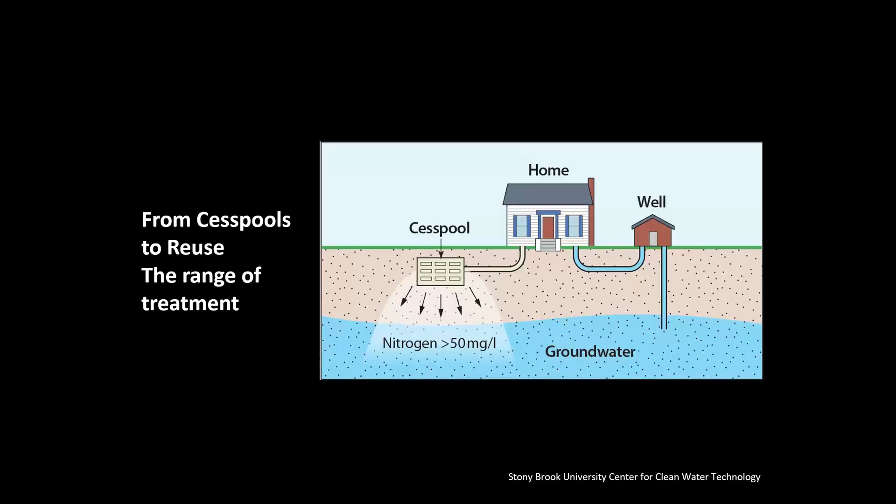I'll talk a lot about nitrogen. A cesspool typically has a nitrate level, or total nitrogen level, anywhere from 50 milligrams per liter all the way up to 150 milligrams per liter entering, or being discharged out of the bottom of that.

Next up in the line is a conventional septic system. In essence, what's happening here is the waste leaves your house, enters a tank, and then goes out for distribution after it leaves that tank. The purpose of adding that tank in between is to trap solids, primarily for the purpose of trapping pathogens. Again, this is all public health driven. There's a little bit of nutrient retention within those tanks.

So the nitrates, or total nitrogen level, leaving the bottom of the leaching structure or drain field—in most places people use drain fields, spreading the waste out horizontally, shallower in the root zone. You get a little bit better attenuation of nutrients and other contaminants by using a leach field or drain field. This works fairly well for trapping solids, trapping fats, oils, and greases from going into the ground, and also trapping some pathogens.

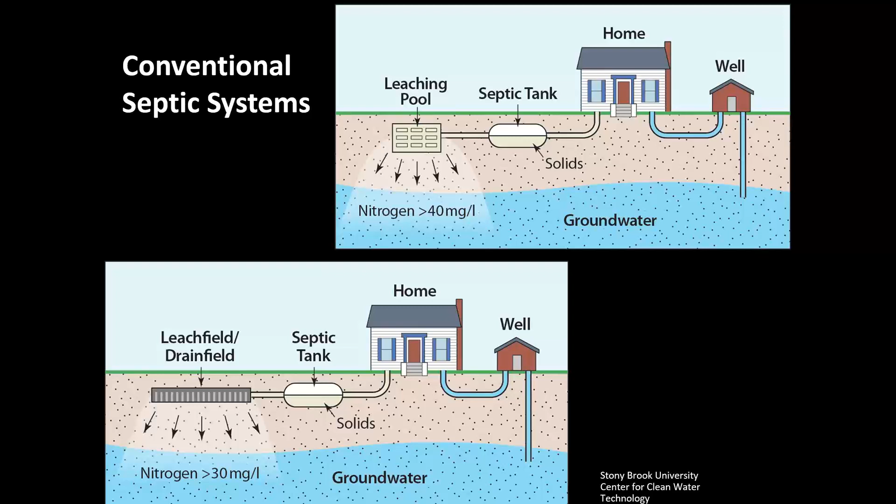However, the implication is that it's maintained, right? So this is what a typical two-part septic tank looks like below the ground—you'd have the water coming in here from the left side of the screen.

It drops down, and this section is big enough that the waste should stay within here for about 2 days before it enters this smaller chamber and then goes out to the leaching structure. Now, if the system isn't inspected and or maintained properly, solids begin to build up in the bottom, and you get a feedback where the more solids build up, the less time the waste has to settle, so solids build up faster.

That begins to fill up the bottom part of the tank, and at the top are your fats, oils, and greases, which rise to the top. What could happen, and I've seen happen over time, is if this type of tank is not inspected and or pumped on an appropriate basis, those two levels can constrict the water, and literally what was a tank is now acting more or less as a pipe, and you're left with just a cesspool, and or it backs up into your house and you have a really bad mess and a big problem within the home.

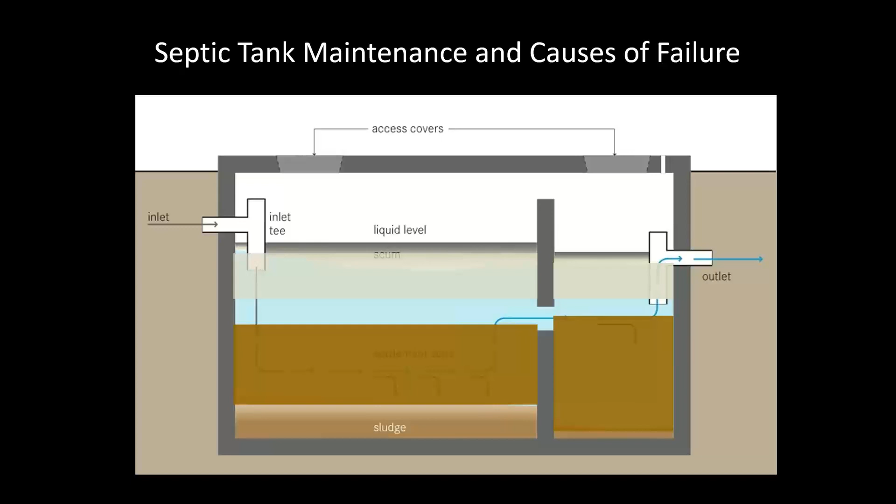And so that gets us to failure. What does failure mean? There are two types of failure. Hydraulic failure means that the soils can't take up any more water, that the pore spaces within the soils have accumulated so much organic matter that they can no longer take the water in, or the effluent of the waste anymore, and then it either comes up to the surface or it backs up into the house.

You can see this with cesspools. Often you'll see a big green ring on someone's property that might not otherwise have much for a lawn, and you know that they have a cesspool or hydraulic failure.

Structural failures are much more serious, and sadly they do happen, and sadly people have been known to get hurt and or die in a structural failure, where you actually have a collapsing of the system and you have everything exposed to the surface. What you see here on the right is a hand-laid brick cesspool.

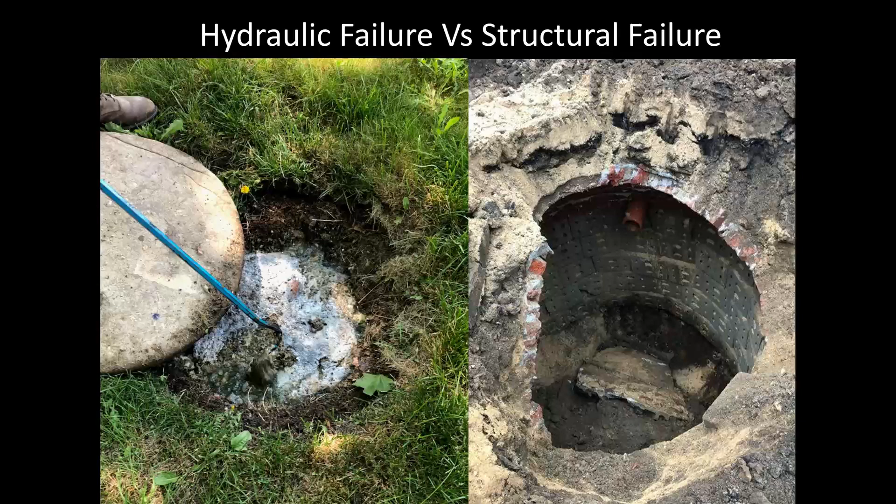Cesspools and septic systems can also fail due to sea level rise. So your system might be functioning. You might be able to flush your toilet. There might not be solids or fats built up anywhere, and the drain field might be able to drain. But what happens is if there's not enough separation between the bottom of that drain field and the groundwater, the soils can no longer serve the function of filtering out pathogens, and then you compromise the groundwater, which then ultimately leads to your surface water.

This is from a report to Miami-Dade County on what is currently happening to a lot of their on-site systems. When a development might have been built long ago, the groundwater was down here. Now several decades have passed and we have sea level rise projections coming for the area. A home at a certain elevation might have a completely compromised or fully failed system. It is now in contact with the groundwater.

This person might still be able to flush their toilet, but they're putting raw sewage directly into the groundwater. A compromised system, as I mentioned, will not have adequate separation to remove those pathogens, and you're compromising the groundwater. And then a home at a slightly higher elevation will still have that separation, but its lifetime is shortened due to sea level rise.

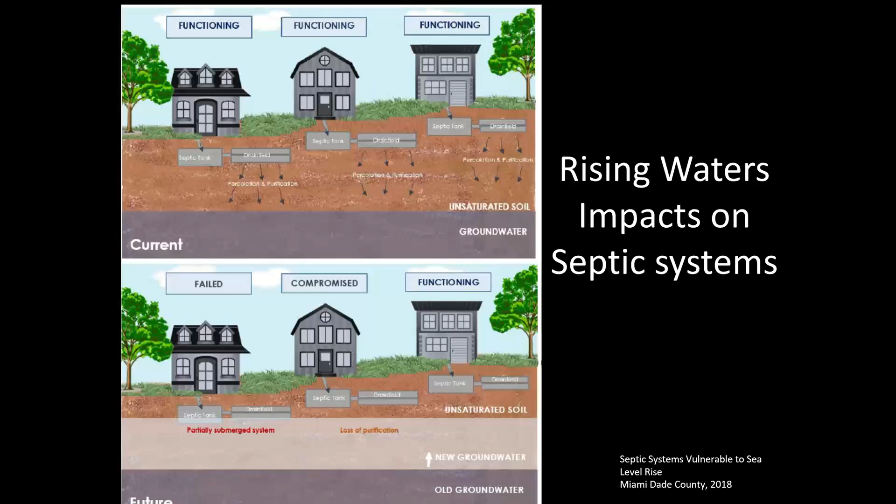So now we'll talk about septic systems and their ability to reduce nitrogen loads. Some call these advanced septic systems, where you have a septic tank coming out of the house where you collect the waste. That then goes to some sort of treatment unit, which may, through processes of aeration and then going back towards an unaerated compartment, be able to remove nitrogen from the system, and then it will go to a drain field.

We'll take an accepted standard of about 60 milligrams per liter of nitrogen coming out of a home, which will then go to a tank and reduce nitrogen loads by about 7% or so. The treatment unit could then get anywhere between 50 and 75% nitrogen removal, getting you down into the teens of nitrogen concentrations. That then goes to a drain field, which gets you an additional 35 to 50% nitrogen removal, with a grand total of 70 to 85% total reduction in nitrogen.

And now, since that effluent coming out of that drain field is stripped of so much of the solids, the nitrates, and the BOD, the biological oxygen demand, which is basically a number of how strong the wastewater is, the soils can do a better job of stripping the wastewater of some of the other contaminants like the pharmaceuticals, the personal care products, and other nutrients like phosphorus. So the cleaner the water is before it hits the soils, the more the microbes in the soils can do to reduce all of the other contaminants.

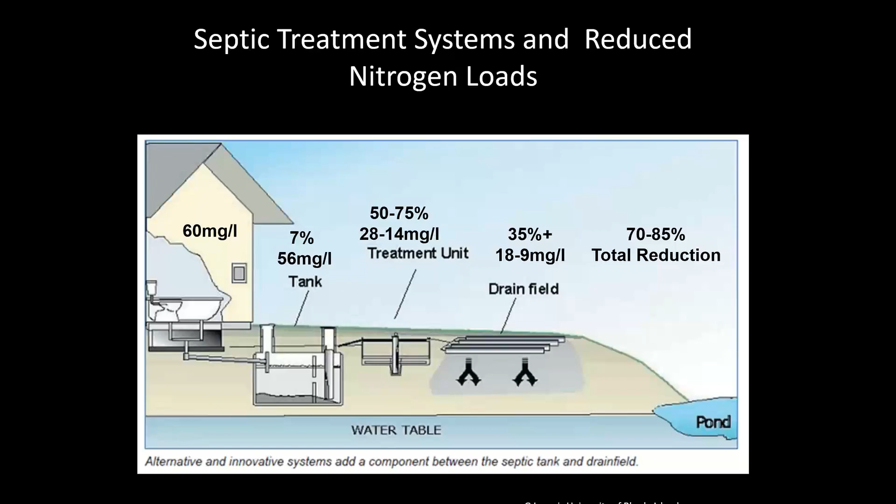Now, all of these systems, as well as most sewage treatment plants, rely upon natural biological processes or microbiological processes. You go to the bathroom, you have organic nitrogen, your proteins, your urea. They leave your home, go into an area without oxygen, and perform a process known as ammonification. They transform organic nitrogen to ammonium.

Now, the next process would be to add aeration, and the microbes that live in the aeration compartment convert the ammonium to nitrate. In most treatment facilities, this is nearly 100% complete process.

Now, if you wanted to fully strip out all the nitrogen from the waste stream before it enters the environment or before it goes out for reuse, you need to send that nitrate-rich effluent back to an environment that has no oxygen and a carbon source, where it will perform the process of denitrification and release the nitrogen as nitrogen gas. Most sewage treatment plants and most on-site sewage treatment systems are limited by the amount of carbon in the waste stream to perform this function, so some add carbon during their processes.

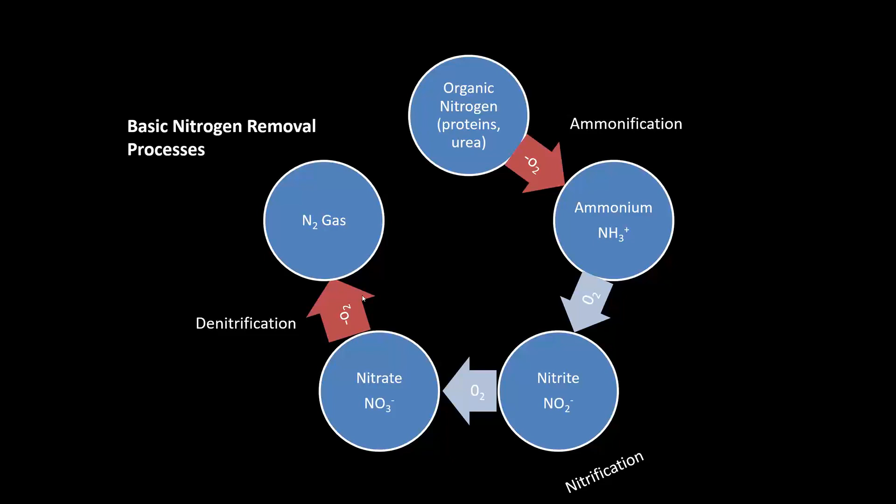So now we'll get a little further down the line and think about the components of a typical sewage treatment system. You have your collection area, and that might be a business district, homes, or some commercial properties. That water gets from the home and goes into a small lateral line for collection. There's a lateral coming out of each home or business, and typically those are privately owned and on private property.

Then it goes into a conveyance system where it gets collected, and those pipes go into bigger pipes known as mains. Some of these mains can be pretty large. If you're fully relying on gravity, they go deeper and deeper into the ground, and sometimes need to be raised back up to rely on gravity again, in which case they'll have a pumping station and then use gravity once again.

Then it goes to the treatment facility where the wastewater gets separated from the sludge and whatever solids are in it, and the effluent then gets treated through the processes I've mentioned above, and then that eventually either gets discharged to the ground or to your receiving water body.

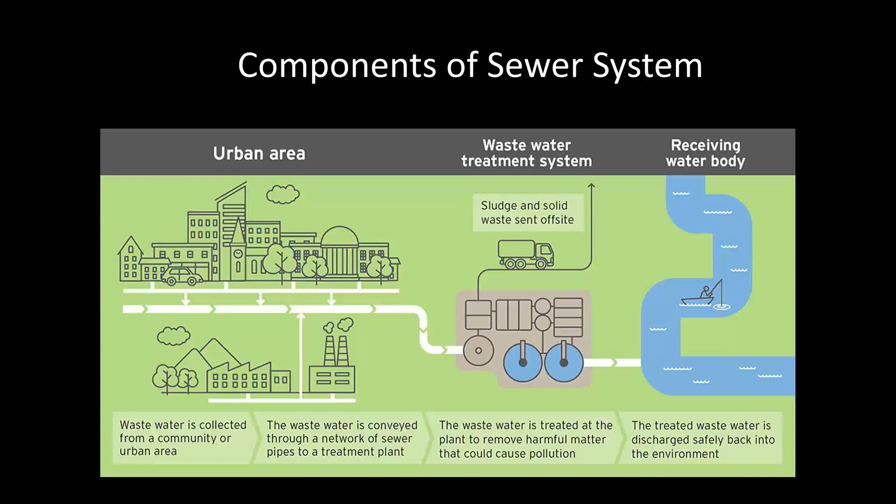So what happens in that treatment process? For one thing, a lot of these sewage treatment plants rely upon gravity to get to the treatment facility, so then they have to lift up all of that sewage so that it could then flow by gravity from one compartment to the next.

The first thing is to pull out lots of solids. There's all sorts of things that end up in the sewage collection system. I've heard of everything from sweatshirts to car tires showing up at our sewage collection system. So they need to sieve out and collect a lot of the garbage and sludge that comes out.

That then goes into those settling compartments that I mentioned, where they have ammonification happening. So the solids begin to settle to the bottom, and over time, as it goes from one baffle to the next, it gets clearer and clearer.

And then the effluent then goes into aeration compartments or bioreactors, where you have aeration and that process of nitrification, breaking down the ammonium into nitrate.

That then would go into a final secondary set of clarifiers, where they have these rotors that move really slowly to keep the water mixed, but they are careful not to add oxygen into that environment, to create the process of denitrification. Some plants at this point could have close to drinkable water. However, the pathogens and such are still in there at this point.

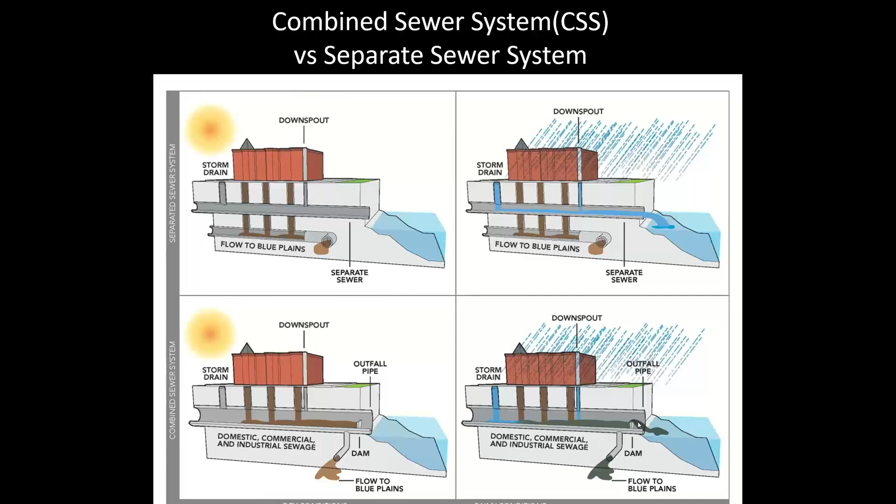But what happens when it rains in a combined sewer system is the flow reaches a point where the receiving treatment facility can't handle all of it. They build little weirs at the ends of their drain pipes so that when flow reaches the point where it could go over that weir, you get a direct combined sewer overflow discharge to your surface water, and now you have raw sewage entering your surface waters.

It had been a challenge to the community for a couple of decades, with lots of complaints about its performance, and nobody had the budget to really do anything about it. So everything kept getting pushed off with this facility. It was completely inundated during Superstorm Sandy, and even to this day, certain parts of it still rely on backup generators to function.

But it's come a long way in the last 9 years or so. They've actually been able to restructure the existing facility, taking 4 of the settling tanks and transforming them into tertiary treatment tanks, which remove the nitrogen from the system. So this sewage treatment plant now puts out 50% less nitrogen than it did just several years ago.

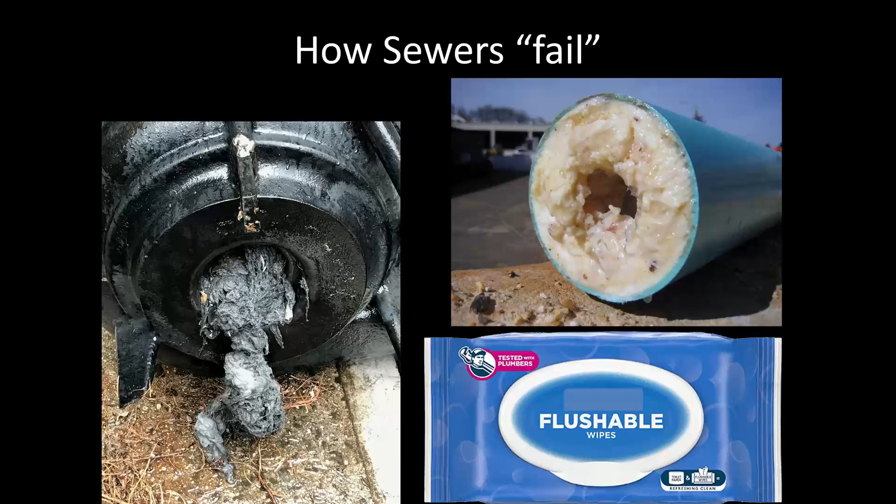Now, I mentioned the sanitary sewer overflow. A combined sewer overflow is when storm water and wastewater are mixed and overflow directly into a surface water body. A sanitary sewer overflow only occurs in a separate sewer system, and this happens when things like wipes and fats, oils, and greases block up the system.

Your street drains go directly into their own stormwater system, and the sewer lateral comes out of the home and enters the sewer main in the street. Over time, a homeowner might have flooding on their property when it rains, so they hook their downspout into the sewer lateral instead.

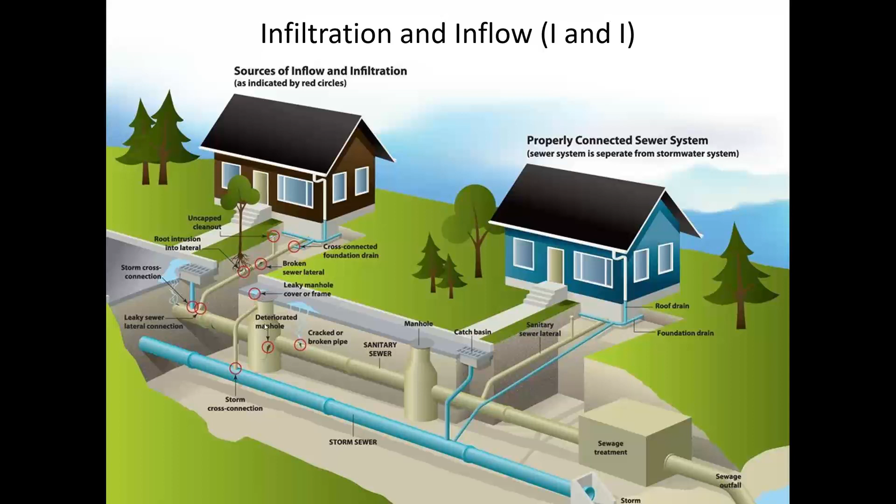After they fixed the system, the flow became much less. They still get peaks when it rains, but for the most part the system is receiving and handling much less water than before. As an example, the treatment facility I showed you earlier has a collection system in really good shape, returning to normal flow within a day or two after a heavy rainfall event.

In contrast, a treatment facility just to the east of it took a whole week to return to normal flow level after about a 12-inch rain event a couple of weeks ago. That's because the groundwater was so high that water just kept coming into the system. Treating rainwater is not an efficient use of a sewage treatment plant.

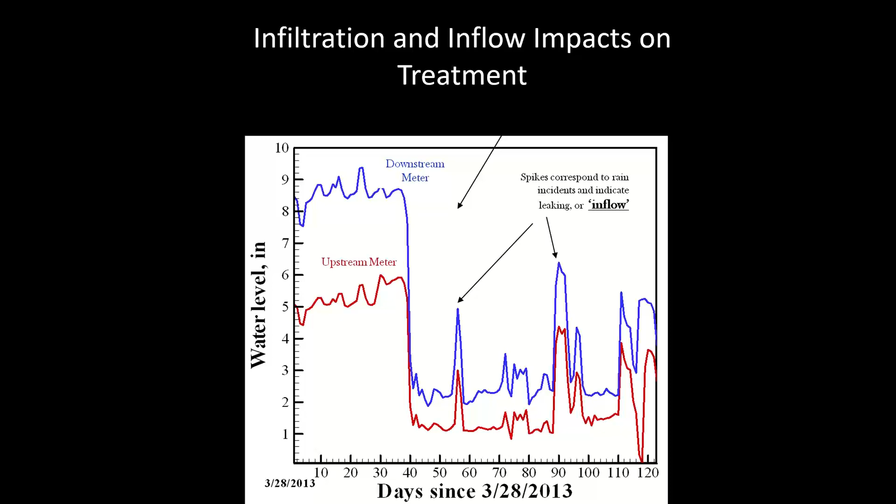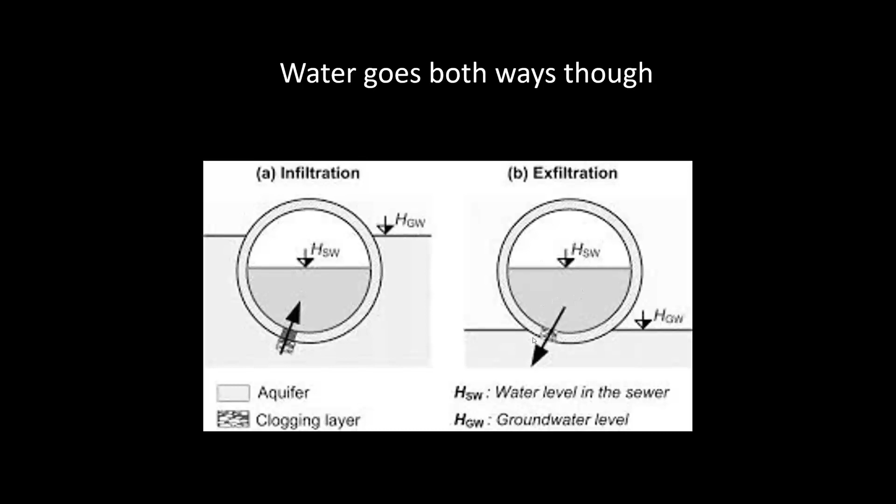And then in dry times, water goes both ways. If you have a force main, where the water going through the pipe is under pressure, you could get sewage leaking out of those mains—that's called exfiltration. So infiltration is when you have high groundwater exerting pressure on the pipes, causing water to come in. And when those pipes are dry and under pressure, you can get sewage leaking out of the pipes into the groundwater.

Don't let a sewage treatment plant be your goal. Don't let on-site systems be your goal. There's an approach to finding the right solution for every situation, and let clean water and healthy oceans be the goal.

Ultimately your path to finding those solutions will rely on what your nitrogen reductions are. You could have on-site systems, or clustered systems where just a few houses share a system. A satellite system is where you have a small sewage treatment plant and water is collected from a neighborhood and sent to one facility. And then you could have a large centralized sewer system.

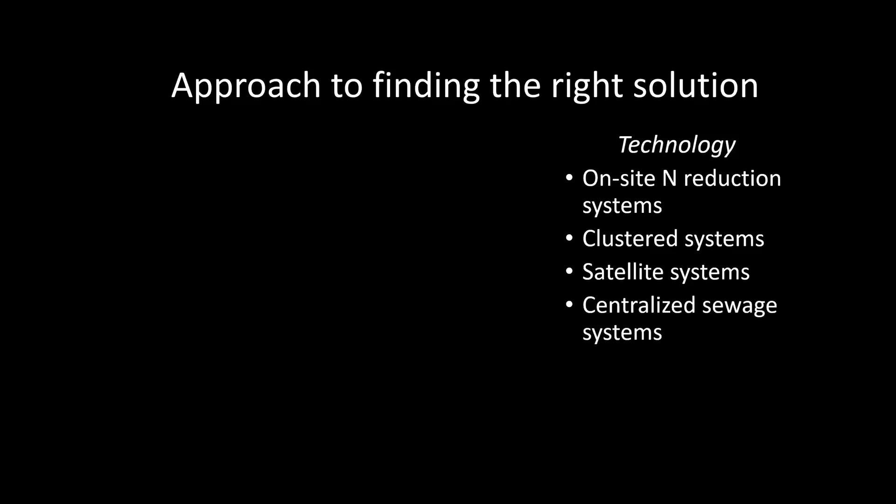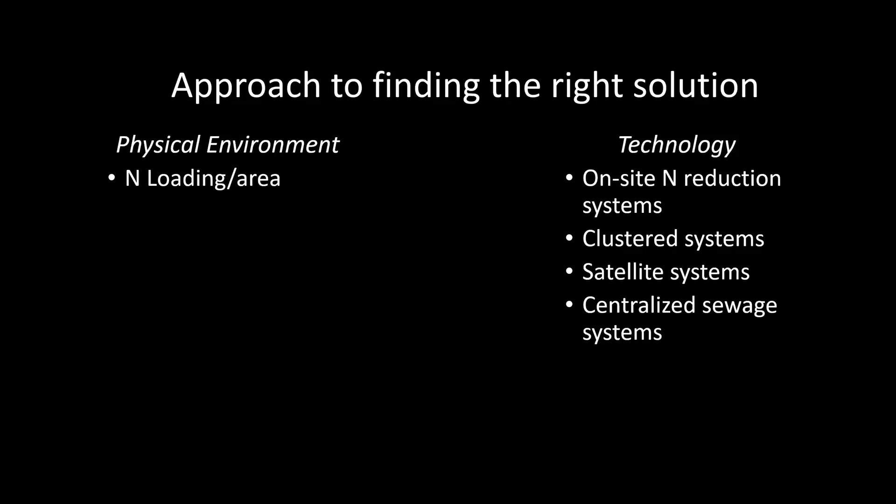That has to be balanced with the physical environment. How much loading, or what's the pathogen or pollutant of concern you want to reduce per unit area? The residence time, so what's the impact to the receiving water that the sewage is going to? For us, depth to groundwater is a really big deal - we have water beneath our feet, quite literally. Your soil types, and what type of density you're looking to capture.

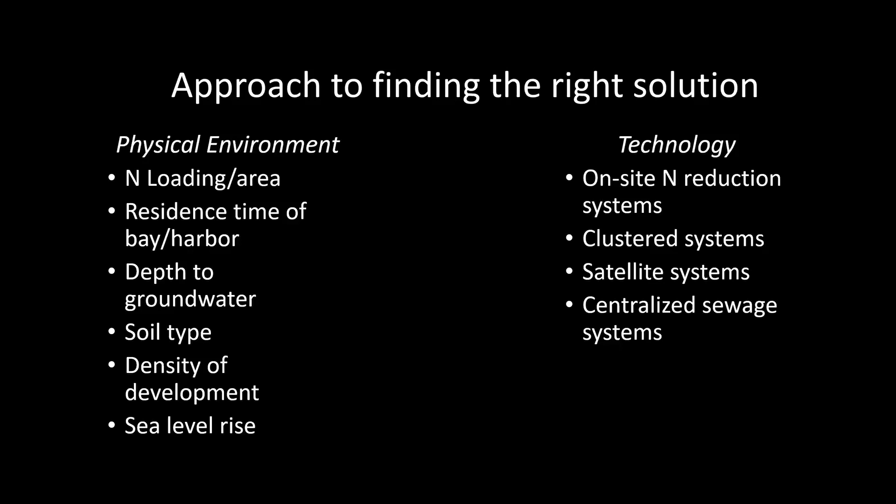And every scenario should consider sea level rise. A lot of these big sewage treatment plants are put intentionally close to the coast because they rely on gravity. That might not be the best solution moving forward.

And then you have to balance all of this with costs - how much is the cost, and what's the workforce required to do operations and maintenance? That will give you a number of what's your best bang for the buck, cost per pound of removal of whatever your pollutant of concern is.

I would never have imagined 6-7 years ago that these on-site systems would be more cost effective than a sewage treatment facility. Conventional knowledge was that they weren't, but the costs lately are showing that it's 5 to 6 times cheaper to upgrade and clean up our waters with on-site systems than to build new sewage treatment facilities. Not to mention we just don't have the land or capital costs to do so.

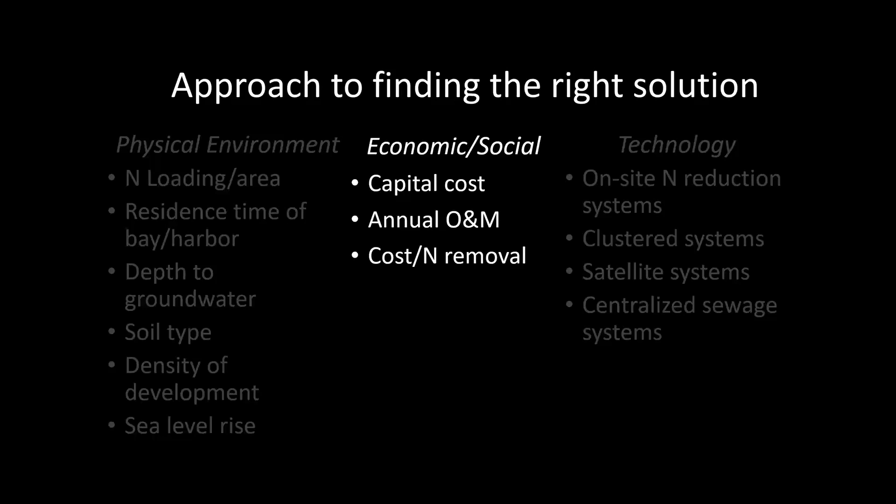So with that, happy to open up the discussion.